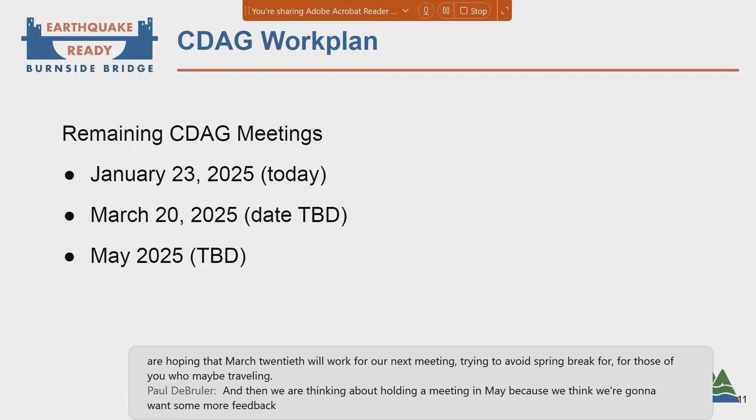We just wanted to give you a quick update on where we are for the work plan. We have our next couple of meetings that we're starting to plan out. Today, of course, we are honing in on March 20th, so ignore that TBD. We are hoping that March 20th will work for our next meeting, trying to avoid spring break for those of you who may be traveling. And then we are thinking about holding a meeting in May because we think we're going to want some more feedback from you all. So we'll get more information as we go through, but that's what we're leaning towards right now.

The next slide talks about our discussion topics that we still have to go through. Again, design is an iterative process, so you're going to hear things from the design team that's halfway through design. They're going to come back and you'll see things and it'll look different, and that's just this process. We want to keep you updated throughout the process.

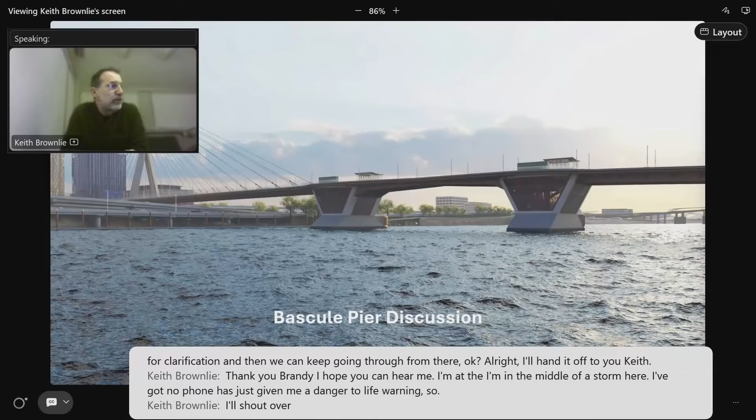Great, well thank you, Brandy. I hope you can hear me. I'm in the middle of a storm here - my phone has just given me a danger to life warning, so I'll shout over the melee, but let me know if you can't hear me. So the subject tonight is, well, as on the screen, the Bascule Pier as a discussion.

Also known to you as the in-water piers, these are the two significantly scaled pieces of infrastructure in the river, and all that's manifest with them.

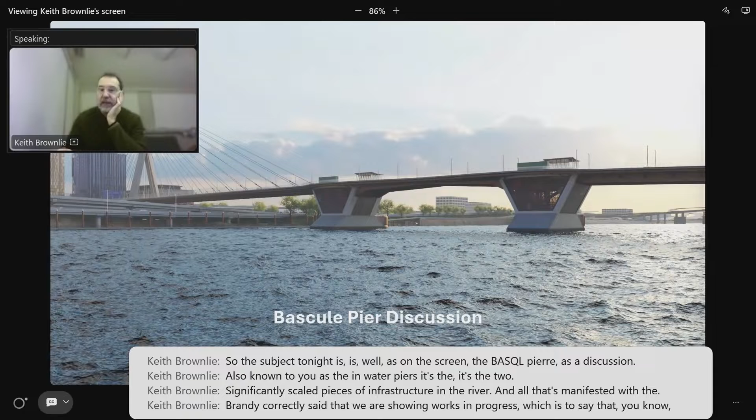Brandy correctly said that we are showing works in progress, which is to say we're not there yet, but it's a kind of full disclosure of where we're at, show and tell. Where we will land may not be exactly here, and this is architecture light. In other words, this is about layout and components, not about architecture, style or form per se.

So, caveats aside, we want to talk about the components and the adjacencies of those components in those areas. This sort of X-ray shot looking down on the deck, I'll break down, but what it tells you, and what I will repeatedly tell you, is that there are a lot of components at play. It's a complex composition, and of course our job is to make clarity and simplicity out of complexity.

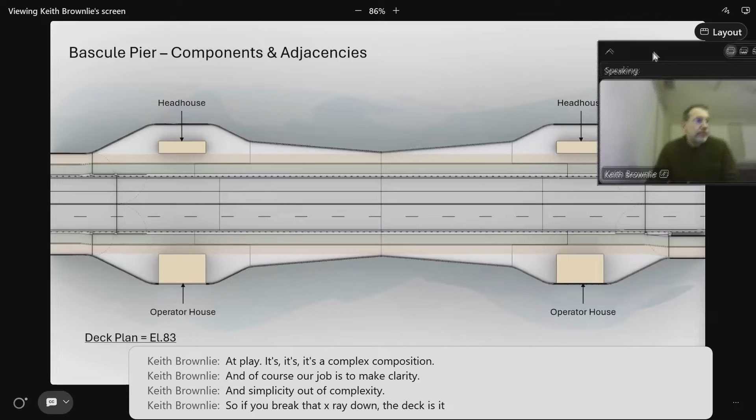So if you break that X-ray down, the deck is the kind of tangible thing that most people will experience. You've seen this before, the deck shape, and on that deck, aside of the highway lanes, in green there, the cycle lanes, and outside of that, the pedestrian lanes, there is a public realm. But it's not entirely public realm, because within that are parts of the moving bridge, non-public functions, which are the operator houses on both piers and what we are calling the head houses. I'll come back to that because that is a point of considerable debate amongst ourselves and possibly yourselves.

If you strip away the deck, you get a framework, and that framework is still a work of coordination. I'm showing you the moving bridge, but the moving bridge is contiguous with the fixed bridge on either side, and it can't be developed in a silo independent of those.

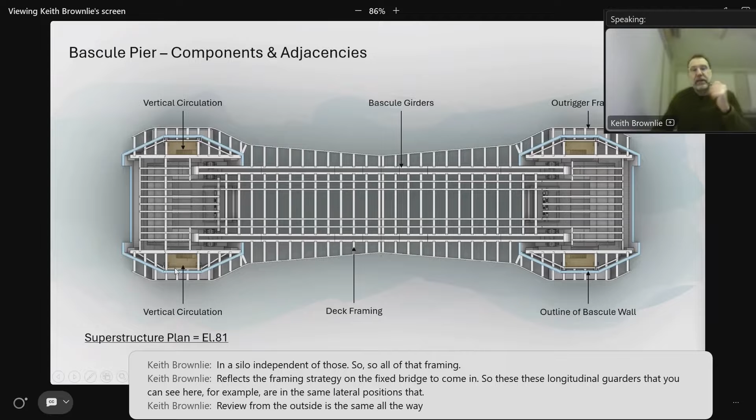So all of that framing reflects the framing strategy on the fixed bridge that comes in. So these longitudinal girders that you can see here, for example, are in the same lateral position as they are on the fixed bridge. So the view from the outside is the same all the way along the bridge, and that's that point of continuity that I've talked about since we first met.

So here are the two Bascule piers. This is the shape of them just underneath the deck, and then beneath that, as you go down and take a cut lower down, there's the Bascule chamber itself. Surprising perhaps to some people, the last time we spoke, is that what's in that is largely void. So what you're seeing here in grey is a big void space. The reason for that, which I'll show you in a moment, is because the counterweight of the moving deck disappears down into that big hole there. So it's a big object, but in terms of physical construction, it's a perimeter construction with a big hole in the middle.

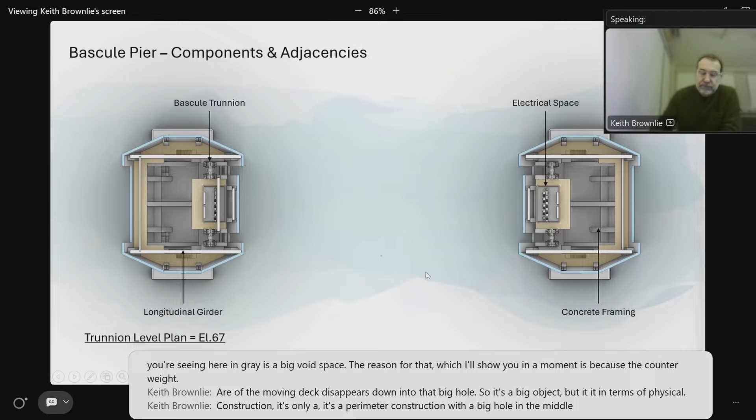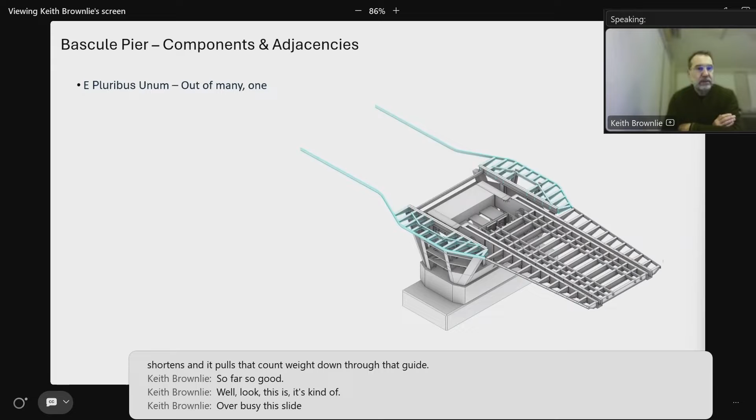Well, look, it's kind of over busy, this slide, but the point it's making is, well, there we are, a little bit of Latin for you: out of many, one. So out of that extremely complex composition, we're getting something which has legibility, that it can be read from the outside and from the deck as being a simple affair. I'm sure everybody's seen more than enough of that.

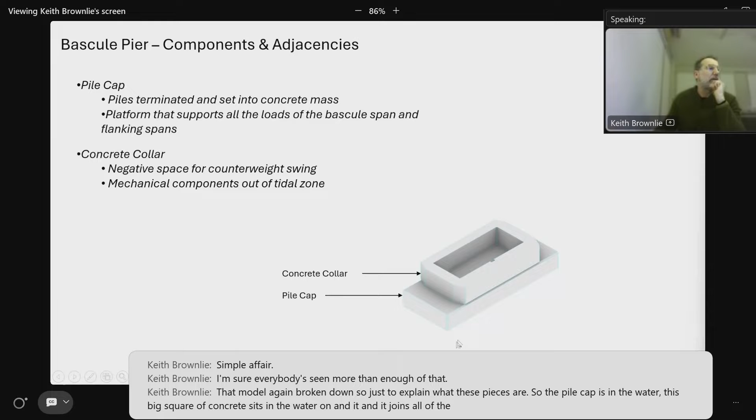That model, again, broken down - just to explain what these pieces are. So the pile cap is in the water. This big square of concrete sits in the water, and it joins all of the piles that go down into the ground. On top of that is a concrete collar. The top of that concrete collar is at the level of the 100-year flood. So this thing is a submersible piece.

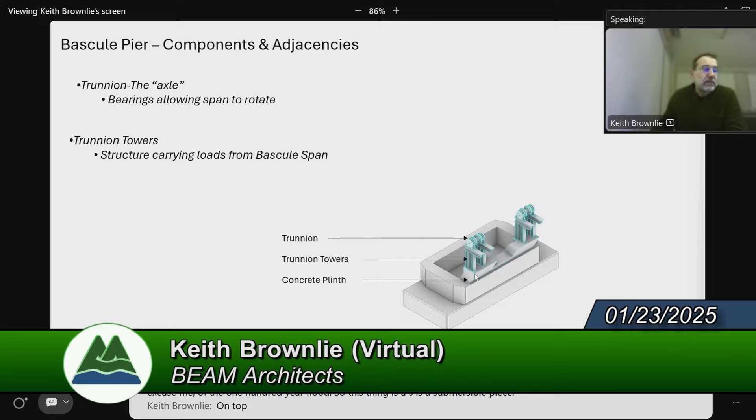On top of that, which I've already described, are the trunnion towers and the trunnions themselves. These are what carry the load of the deck down into that load-bearing pile cap arrangement down into the piles.

And then built around that is a framework that supports the incoming fixed deck, which is out here. Well, I hope you can see my mouse, but this is the primary framework that supports the rest of the bridge.

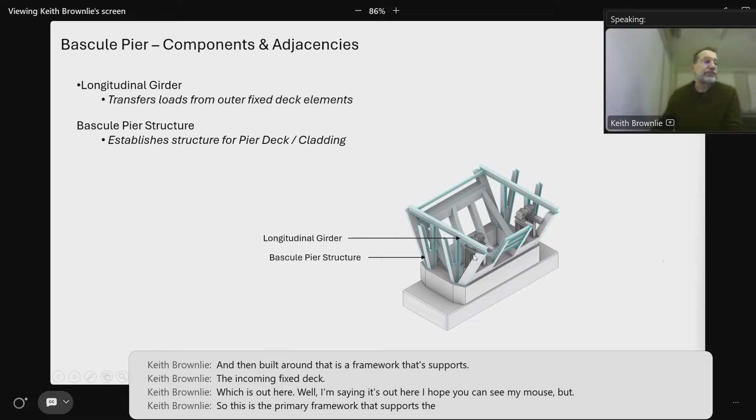And then layered into that are floor plates for circulation around those moving parts. Again, leaving out this void space, which is where the counterweight slews down to allow the deck to slew up.

Here are the primary beams, the bascule girders, and there is the counterweight sitting within it. As you can see, those primary girders sit with those trunnion bearings that rotate.

And then tucked between them, obviously it's an electrical procedure. There is a significant electrical room that sits in that space. So it's busy, and there are a lot of elements to contain. That sits within its own waterproof enclosure underneath the bridge, but within the bascule chamber itself.

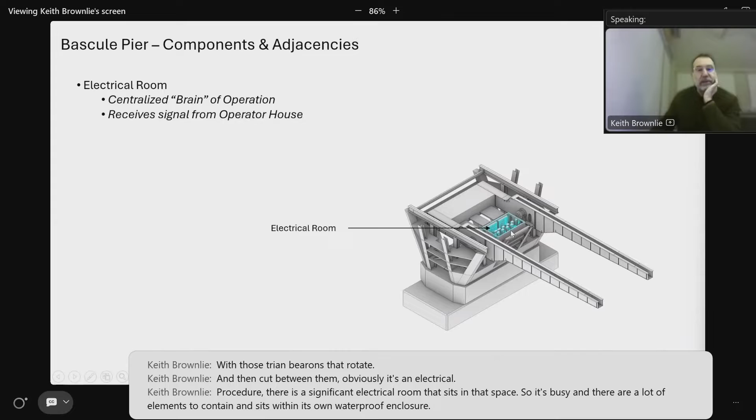And not my words, but good words, that is the brain of the operation. I previously thought that was me, but clearly not. And it receives signals, it receives instructions from the operator house above the deck, which we'll look at in another section of this presentation.

So those two primary girders are then framed with transverse structure across the deck, which will support the deck itself.

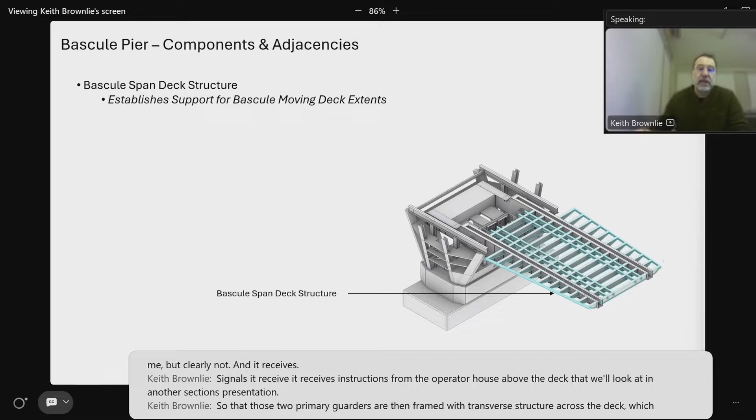That framework continues around the outside. This fringe that we have long talked about, this framework that runs around the outside and recesses all of the main structure, so that you get a thin edge, you get a shadow line over all of that primary structure, and it's architecturally an effective means of

giving manners to the composition, reducing, or not reducing the scale, but giving the impression of mitigating the scale.

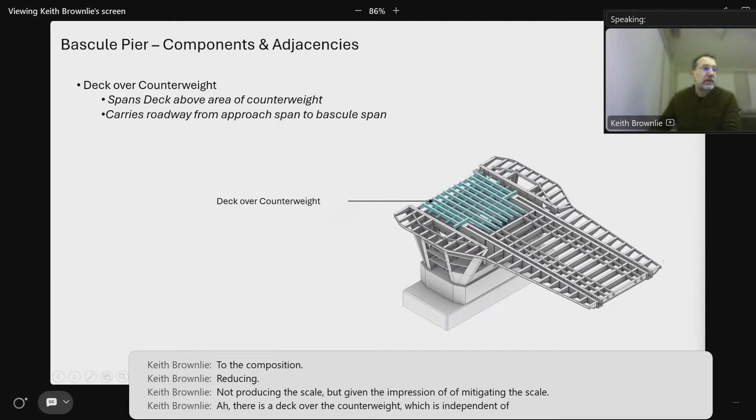There is a deck over the counterweight, which is independent of this lateral framing. And then this piece of deck sitting over the top is fixed. This is the fixed bridge.

Everything that you're still seeing the framework of is the moving bridge. You can see that those girders slot back into the fixed bridge. So there's not a straight line. There's a kind of integrated connectivity between the two.

And then we deck the bascule leaf itself. And then you see that that movement is facilitated. Okay, enough perhaps. It's doing it itself. Super.

And then, just to go back one, so you'll see that we're still seeing the framework down here. There will be a cladding to that bascule chamber. Now, the idea of that cladding is not weather tightness, because the bascule chamber itself is an unconditioned space. It's more akin to a rain screen and an architectural facade.

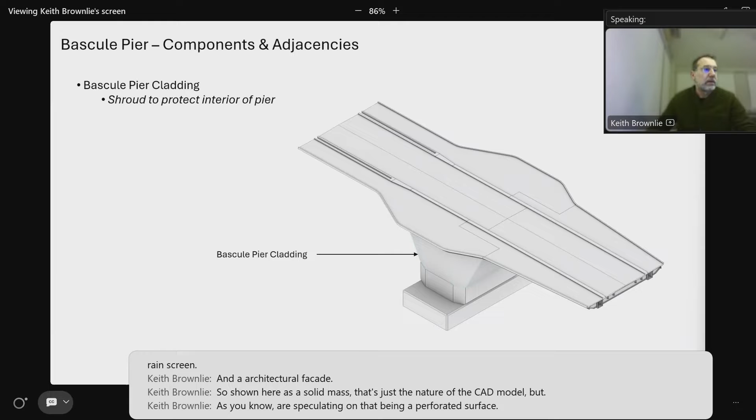Then the cherry on this particular cake is, there's a great word here, these are bridge appurtenances, which is a lot of the safety edge conditions, fencing, railings, guardrails.

The guardrail refers to the separation of the vehicles from the footway and the bike path. And then you get closable pedestrian gates and vehicular gates to stop bridge users when the bridge is opening, well short of the opening leaf, which is back here. So that is a predetermined set of distances from the moving parts back here, for safety.

Not shown here are the operator house, which sits in this location, and the head house, which sits opposite over here.

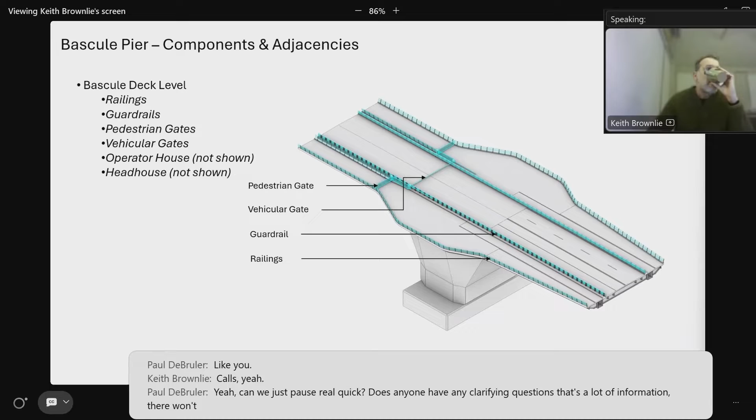So at this point, I don't know, Ravi, sorry, are we going to pause? Yeah, yeah, can we just pause real quick? Does anyone have any clarifying questions? That's a lot of information. There will not be a pop quiz at the end of this. So, but I think Keith is trying to help you all understand how complex this is, right? So are there any clarifying questions?

Yeah, just a quick clarifying question about the function and the distinction between the operator house and the head house. The operator house seems fairly self-explanatory, but I'm not quite sure what's the purpose the head house is serving.

Well, may I defer that question because it should be pertinently clear from the next set of slides, which deals with just that subject. Keying us up, Patrick, for the next. That works fine. Okay, thank you. Any other clarifying questions?

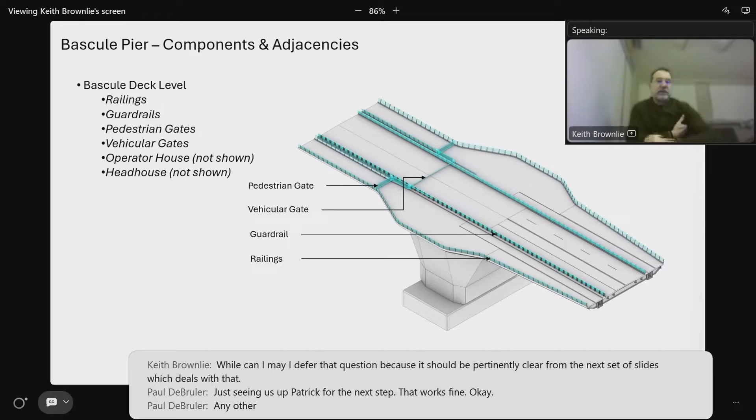And it's okay. Gwen?

I'm wondering about the watertight electrical chamber and its height above the river, and if it's equivalent to what we have today, and just how far over the 100-year floodplain it is, and what's the performance spec on that for the electrical specifically?

So Keith, could you hear that? I may not be the best Keith to answer that because Keith Griesing from H&H is in the room, but the chamber sits just underneath the deck, in this position, immediately under the deck. So it's physically as high as it can be without being on top of the deck. It's well above the 100 and 200 year flood level.

Any other clarifying questions right now? There will be time, at yeah, Valerie.

Just trying to picture what this looks like as it functions. Is the pedestrian gate and the vehicular gate for when it opens? Like, what is the function of the gate? Yes, those are to stop vehicles and stop pedestrians when the bridge is about to open.

Well, they are, as I said, at prescribed distances from the opening. So there's a minimum distance, but it's largely to do with the fact that if we put the pedestrian gates parallel or sort of continuous with the vehicular gate, at its requisite distance, we get into complications. You can see it's at the break point between the straight deck and where it flares out around the bascule chamber. So it's a swing gate, and it's about at its maximum. If we had it out here, you would be adding another about 12 feet onto that gate, which is just beyond reasonable.

Okay, great. Okay. All right, well, we'll pause there, and Keith, you can take it away to the summary.

Okay, well, it occurs to me that even within the team—the designers, the contractors, the owners, everybody concerned with the project—there is not universal clarity about the drivers for what is emerging as the design. That's both relative to the operations and in particular to the operator houses. So I just wanted to try and summarize the brief. I don't know that I've done that particularly well. I don't know whether this is a summary of the brief or just a brief summary, but these are some of the things that concern us as we go forward.

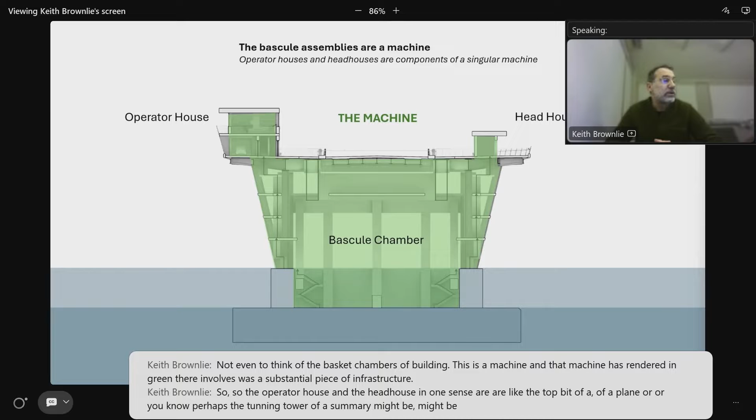So the operator house and the head house, in one sense, are like the cockpit of a plane, or perhaps the conning tower of a submarine might be a better analogy. And while I'm on maritime analogies, that machine, like all good machines, hides the majority of its workings. It's an iceberg—the ratio between what you see up here and what you don't see down here is significant.

So there are some clues in this, but they are not standalone items. They are very much physically and philosophically linked with what's underneath. This analogy falls down rather when you start to imagine this is above water and this is below water. Clearly it's not—it's above deck and below deck rather than above and below water.

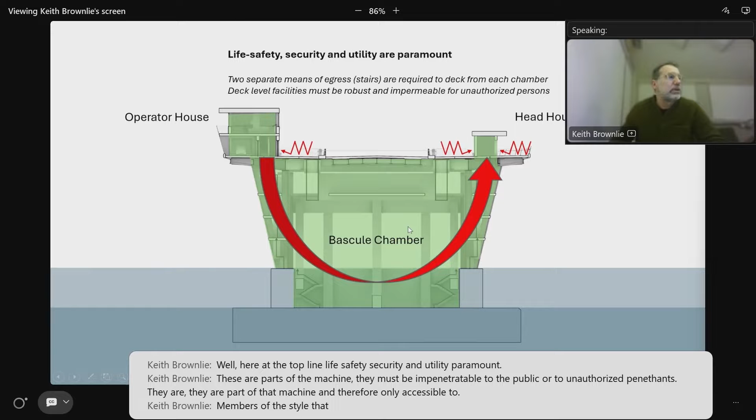So just rather more technical than the red arrow you just saw, there is a series of staircases and gantries in the vertical and horizontal planes. Now we don't have a lot of space in these things.

When it's set out, those black squares are the longitudinal girders, and the trunnions are in these positions. And that's the counterweight which goes down inside. So there isn't a great deal of space. So all of that circulation is done outside of the operational machine, so to speak.

And there's a lot of structure in here. So the staircase does what it needs to do to avoid all of those other constraints. Those constraints mostly being structure.

So over here on the head house, there's been a lot of discussion about the relative position of that head house. Should it be at the back of the path? Should it be on the outside of the deck? Should it even be beyond the deck?

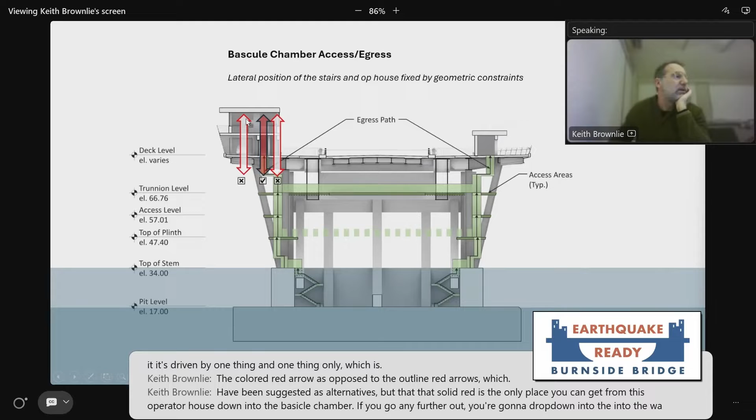Well, it's driven by one thing and one thing only, which is the coloured red arrow as opposed to the outlined red arrows, which have been suggested as alternatives. But that solid red is the only place you can get from this operator house down into the bascule chamber. If you go any further out, you're going to drop down into the water, like a medieval long drop. And if you go any further inboard in an attempt to change the arrangement of that building, you meet structure very soon, and you lose head height, so you can't locate it there. And that's important because it sets out the footprint of the building in space definitively.

I've said this previously, there are no public functions. And the truth is that the operator staff need safe access to get into their facility, which is up here. And the maintenance staff, who are incidentally not the same people as the operator's staff, also need that safe access. So they're going up and down,

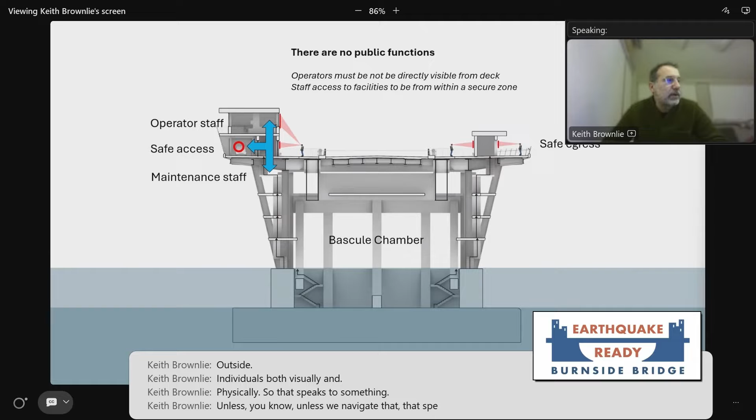and never the twain shall meet. And they need protection from outside individuals, both visually and physically. So that speaks to something solid. It's not a retail store or a coffee shop. It's part of a machine.

So it's not an insubstantial thing. It's a two-story facility. This is the deck level. This is the upper level, approximately the same footprint. We're working on the size, but you can see that out to out, it's something like 24 feet deep and 38 feet wide. It's bigger than the current operator houses on the bridge, but it's 100 years later. So there are better facilities, and I think you would have been into the current facility, which doesn't leave much room even for the imagination.

So just to look, I think the next slide would be looking at that deck level. So just to tell you what that deck level does.

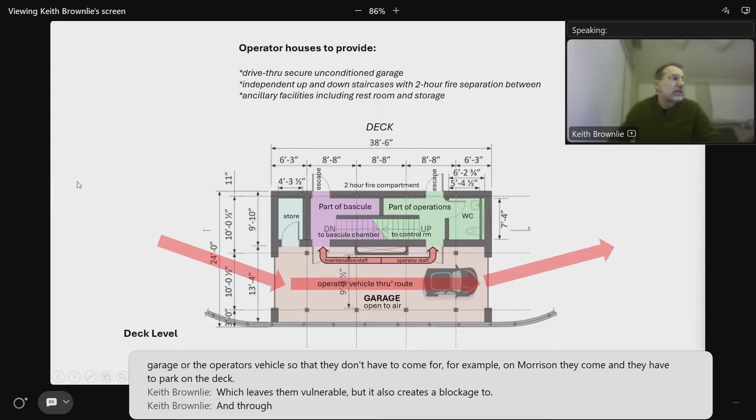There are two parts to it. One is essentially a staircase, also has a little bit of storage and a restroom. And the other part is the garage for the operator's vehicle, so they don't have to park on the deck like on Morrison, which leaves them vulnerable and creates a blockage to pedestrian and cycle throughway. So they come around the back into a secure garage, but it's not a conditioned space. That's just part of the deck. It's outside, but it's fenced so you can't get in, but it's open to air.

There are two colors on here because there are two staircases, one above the other. The green part with the restroom goes up to the control room. The purple part goes down into the bascule chamber. Those two are separate from each other because there's a requirement for a 2-hour fire compartment separation. The architects will know what that means, but really it means that to get 2 hours you need a significant amount of structure. It's not a lightweight thing; it's heavy construction to separate those out.

Just for your information, the maintenance staff and the operator staff are not the same people. It's very rare that the operator staff would go down to the bascule chamber, and conversely rare that the maintenance staff would come up to the control room. It does happen, but they don't follow the same staircase. They come out into the garage and back around. That's how that operation works.

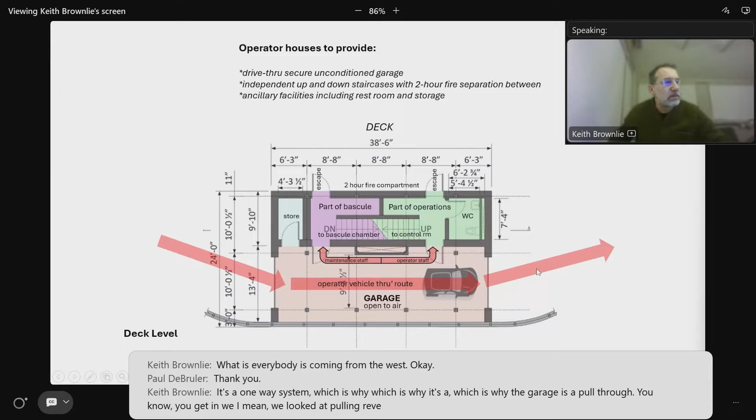And so would the east side operators come up, again, the bike path on that south side of the bridge? Everybody is coming from the west. Okay, thank you. It's a one-way system, which is why the garage is a pull through. You get in. We looked at pull in, reverse out, and all sorts of scenarios, but it lacks clarity.

Okay, great. Thanks, Bob. Gwen? I have a question about elevators. Are you required to put an elevator in addition to stairs? No, I don't want to undersell your question, but no, there's no requirement.

Okay, great. Thanks, Gwen. Patrick? A couple questions for you, Keith. First, the height of the 100-year floodplain, has that taken into account any escalation for anticipated changes from climate change? I've seen a lot of that happening in building design, where they're designing HVAC systems for anticipated hotter climates. Does climate change impact the potential 100-year floodplain, and are we anticipating that here?

Well, if I had a dollar for every inch of sea level rise, perhaps I'd be better off. What I was going to say is that the exact science of where that 100-year flood is isn't clear to me, but it's well above the required level for the brief that we have. What I would say is that, in common with any other facility like this, the bottom of that thing is just a sump, and that sump will have a pump to clear it out. It is floodable. There's nothing in there that would suffer from occasional overtopping.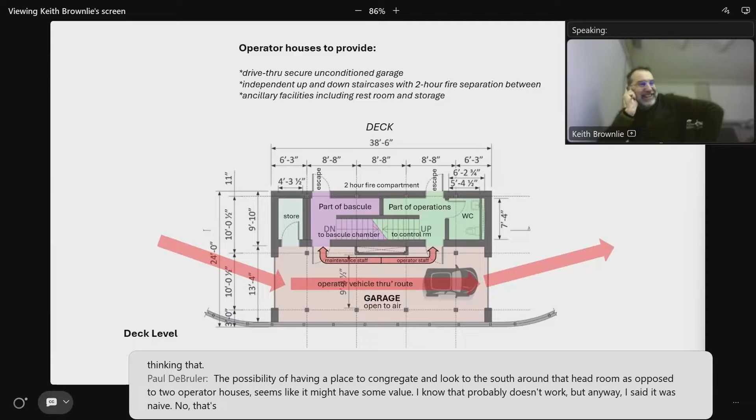No, that's why we're here, to ask questions. Keith, do you have an answer, or do we want to phone a friend? Yeah, well, no, I don't. I don't.

Obviously the public realm aspect of this is big on our agenda, everybody's agenda. One of the issues is that it's controversial to have public access behind those buildings, riverside of them, because of security and their invisibility when the bridge opens. What the operators will tell you, and I have a great deal of sympathy with it, is that people love to be on the wrong side of the barriers and hide and try and ride bridges. So there's a visibility aspect to that. It's just a sort of an aside, really.

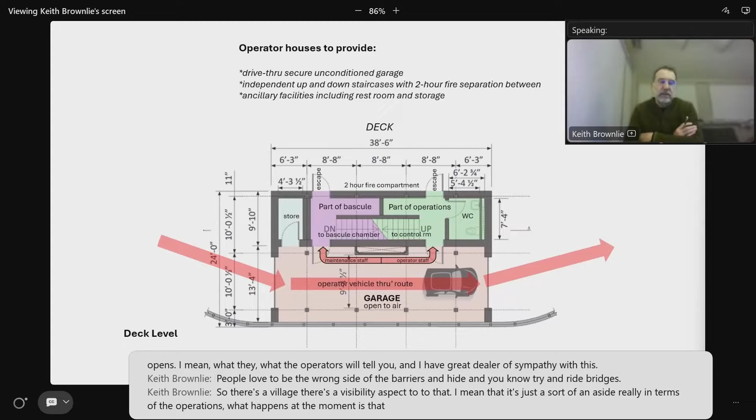In terms of the operations, what happens at the moment is that the operators drive to the end of the bridge on the west side, park, and walk onto the bridge, which is not very satisfactory from their point of view. So the brief says, can we drive to the bridge? So from our point of view, that garage is a kind of act of discretion, put it that way.

I'm hoping that we will come on to the public realm aspects, not so much on the bridge in this CDAG, because you can see from this, right, that there's a lot of information here, but there's nothing tangible in terms of experience or aesthetics. So we need to flush out these technical issues and then come back to you on what it means to the public realm. But the public realm's going to be great. That's all I would say.

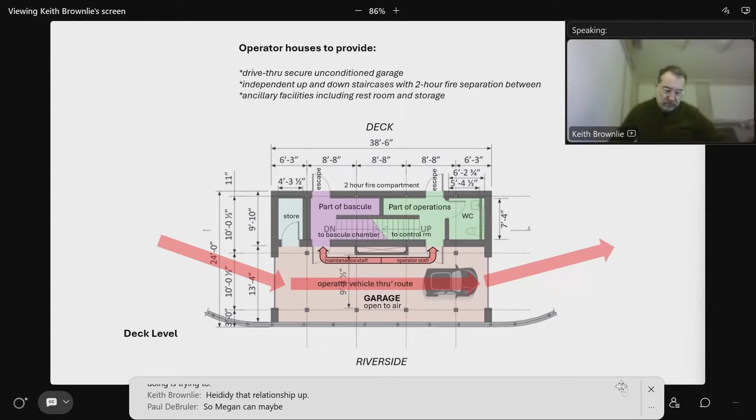So Megan can maybe answer some of this. Yeah, I can speak to this a little bit. You're right, we've not had cars throughout this whole 100-year life cycle of this bridge, but over the years, the operators have really felt unsafe performing their duties on the bridge. They're called out to the bridge at all hours of the night, and parking the car and then walking at night to the operator house, I've heard some people feel unsafe. On the Morrison Bridge, we bought a smart car because it's so tiny, so that people could drive onto the bridge and park the car next to the operator house. Those cars get smashed in the windshield. I think with this approach, we want to just provide a safe place of work really for the operator, which is why we're including a garage here. It's really to respond to operator feedback.

And Megan, can you answer the second part of Aaron's question about how often are cars parked on the bridge? Yeah, so whenever there's an operator called out for a lift, which on Burnside is on demand, then the car will be used. But with this new bridge, we're thinking about making it the 24/7 operation center for all of our bridges. Right now, that's Hawthorne. So any time of the day, you can call the Hawthorne, someone will be there. It's our eyes and ears all the time for our collection of bridges. But we're thinking with this improved space that we might transfer that to this bridge.

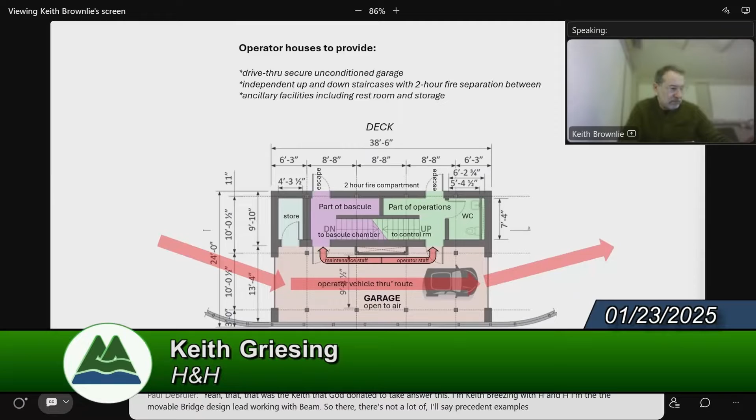I'm Keith Griesing with H&H, the movable bridge design lead working with Beam. There's not a lot of precedent examples on this particular instance. No, not that I'm aware of that have a physical enclosed protected space. We are in a parallel state with a number of bridges putting in a similar parking type facility that is not protected.

In the discussions we had with the county as part of this project, they felt that having that parking area protected was of utmost importance, not only for the safety of the vehicle, but for safety of the staff using it. There's a lot of discussion relative to the operators, but it's also dual purpose for the maintenance personnel, who usually come up with equipment, oilers, and other things of some weight. The ability for them to drive up to the bridge without lugging their equipment the length of the bridge is definitely advantageous.

So we opted for what we're calling a garage, but it's really open fenced space on three sides and enclosed on one side with the solid wall of the staircase - the best compromise to achieve all these goals.

When could we expect to see a sketch of what that's going to look like? I think there might be one in a minute. Yeah, in two slides.

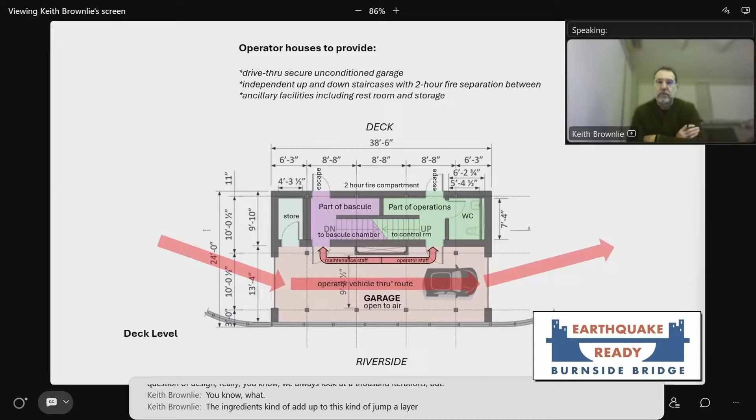the ingredients kind of add up to this kind of jambalaya. And I'm guessing, Valerie, you'd like to see them look at some other options. I mean, yeah, we've been talking about having a safe bridge, including for pedestrians. It seems like we would be working towards something that's keeping everybody safe on the bridge rather than just the operator vehicle occasionally, or operator.

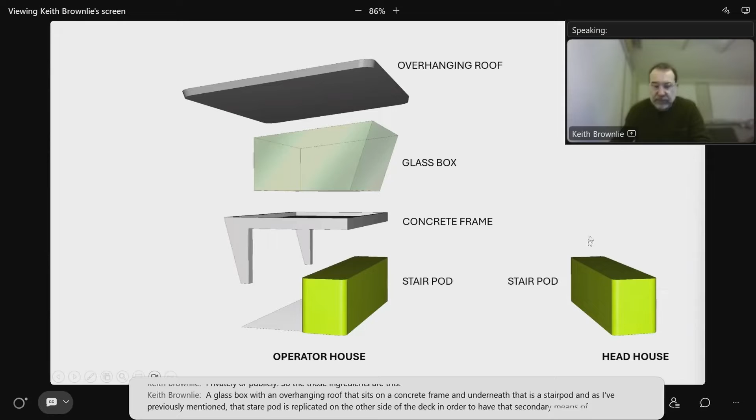If you collapse those things, you get this kind of form. This is a cartoon, not a building design. But it's all about this—about getting free circulation and clear visibility in that control room.

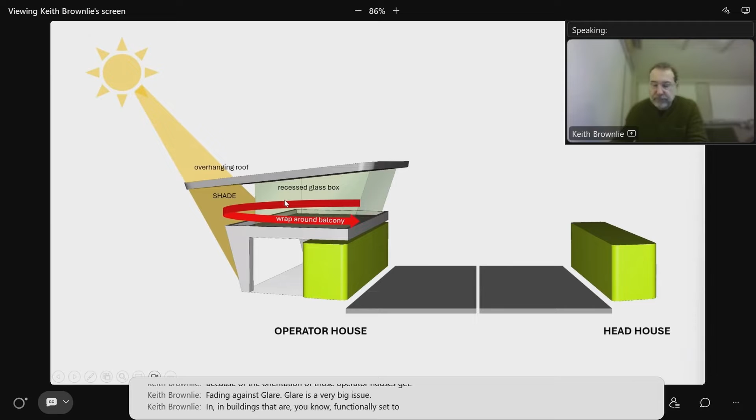There's also a pair of requirements, as I previously said, that by recessing that glass box, you get a wraparound balcony, which is desired. You also, because of the orientation of those operator houses, get shading against glare. Glare is a very big issue in buildings that are functionally set to be having clear sight out.

We've talked about this—there's the vehicular route coming through what is labelled garage, but is actually residual space to that idea that what you've got upstairs is bigger than what you've got downstairs, right? And then you've got that staff through-route for the head house on this side.

So look, I don't want to give you the impression that this is architecture. It's not—it's those components put into a model to see what falls out of it. So that green box is the stair pod, the concrete frame over the top that holds up the glass box. You've got an overhanging roof and some structure to hold up that roof. And there's kind of conversations between the framing of this and the framing of this.

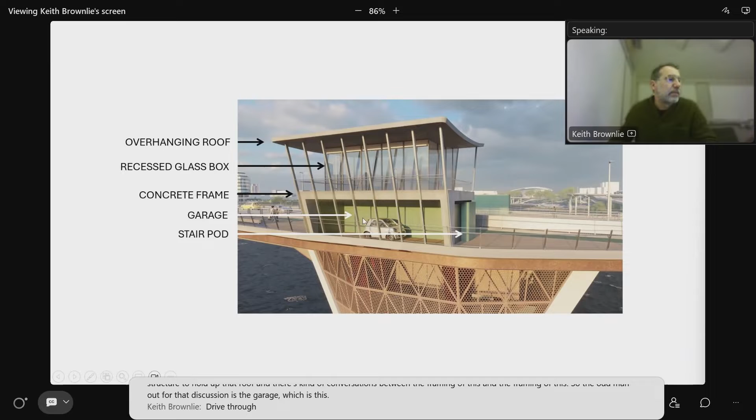So the odd man out from that discussion is the garage, which is this drive-through use of the residual space. But that's about magnitude.

So that thing is the embryonic form of the operator house. That thing, when you take away the control room, what you're left with on the other side is that thing. So there's this notion where we don't know what these will be in form, but there's this notion that on the south side and the north side, you get reciprocal pieces of construction.

And part of the reason for that is this: this is a very traditional thing in bridge design. There are reasons for it, which I'm not going to go into, but you'll see these all over Oregon, all over everywhere—that the center span, usually, and sometimes the entire span, is marked by these corner markers, these obelisks.

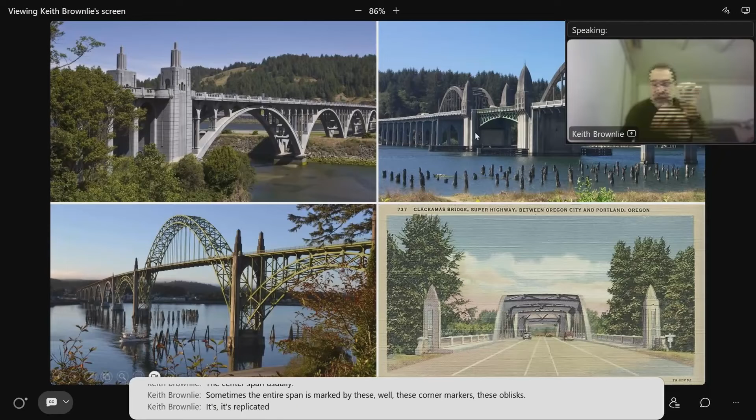It's replicated time and time again, so there's something that speaks to that idea. Well, look here. In really basic terms, here are those blocks. I don't think they'll be as tall or as blank or as boring as this, but it's that object sucked out of this composition and popped over here.

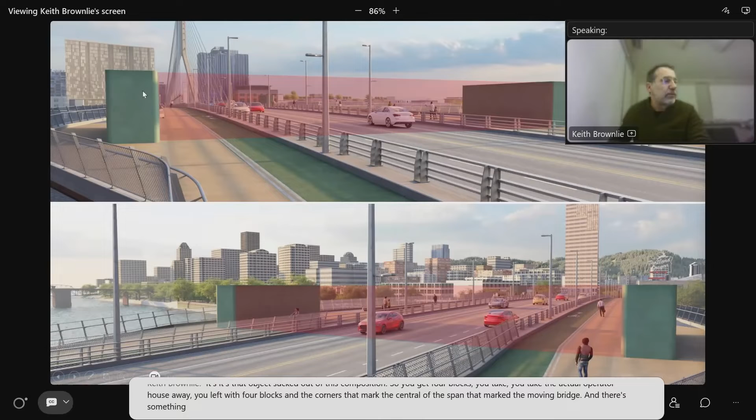So you get 4 blocks. You take the actual operator house away, you're left with 4 blocks on the corners that mark the center of the span, that mark the moving bridge. And there's something that signalizes that, and I think that will be very clear to the bridge users as they pass there. They know that they're passing into the center span.

Very briefly, this is what we have to respond to, and I mean that decidedly. We have to respond to this. These are the best bits of that bridge, unless you're a kind of structures nerd like me. The materiality and the color of these are interesting. This is not — I mean, these are masquerading as 19th century from the early 20th century. I don't want to masquerade to be either 20th or 19th century in the modern era, but there are clues in here. So what could we use?

Patinated copper — it's a very traditional moving bridge material. Glazed blocks and bricks is something that might be of interest. The 2-hour fire rating is difficult, but here, could these blocks be illuminated?

Does the glass feel vulnerable? Well, yes, but there are ways and means. This product here is called Kalwall, which might begin to deal with that, so that those blocks might become corner lanterns rather than corner blocks.

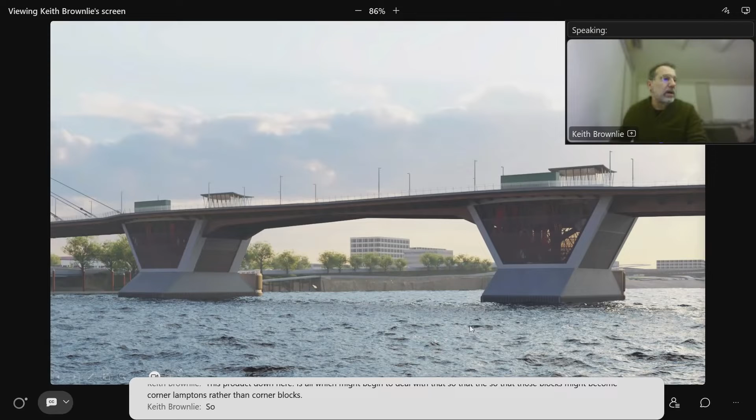I think we're over-egging the pudding here a little bit, but this is the kind of magnitude of those things, right?

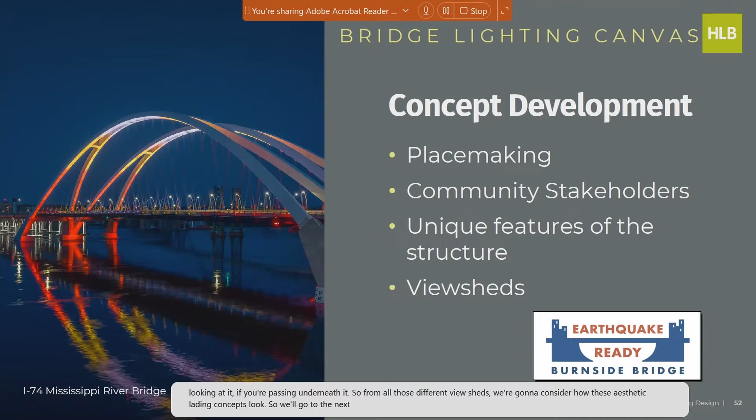So we'll go to the next slide. We had a lot of help when thinking about what the community stakeholders thought by taking a look at the guiding principles that you all shared with us. There are a few that aesthetic lighting can really help support. One of those is, how do we support balancing the scale between these different aspects of the fixed bridge and the movable bridge? How do we create its place in the Portland skyline in an appropriate manner that helps blend in with what's already there and celebrate this new bridge?

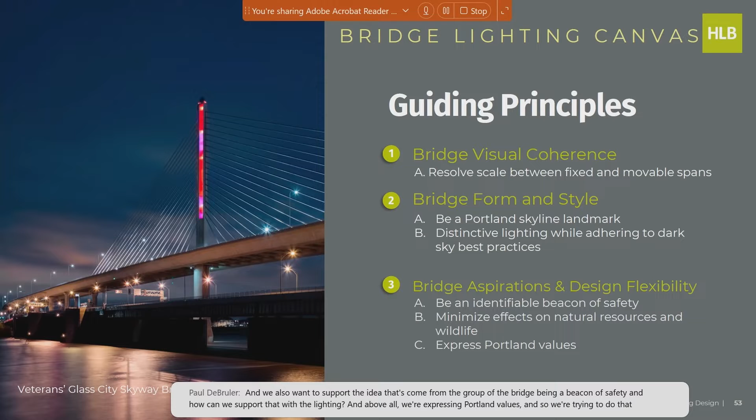But of course, we also want to be sensitive to the nighttime environment, so we're respecting dark skies, being thoughtful about minimizing effects of lighting on our surrounding natural environment. We also want to support the idea from this group of the bridge being a beacon of safety, and how can we support that with the lighting. Above all, we're expressing Portland values, and I think we're already addressing a lot of that with these guiding principles.

So let's be clear about what is an aesthetic lighting canvas. Our goal for this meeting is to really set what parts of the bridge make sense to light, what is the canvas of light we're going to have and be able to use aesthetically. If we focus on that this meeting and get to a place where we understand what the canvas is, in March we'll be able to talk about scenes, where we can talk about color, is it static, is it dynamic, all those aspects of light.

Just as an example, the bridge up here is I-74, which goes across the Mississippi River between Iowa and Illinois. This bridge, all in white light, is showing its canvas. The decision was made to only light the underside of the arch. They had to decide which sides of the piers to light, the fact that they are not lighting the edge girder, and then they made a decision that only the arch is color changing.

So with that established canvas of that bridge, if we go to the next slide, then we developed the scenes you see here. That community thought about which events, which festivals, which seasons they wanted to celebrate with different colors or motion or static scenes. That's what we'll talk about with this bridge in March. But to get there, we have to figure out what parts of this bridge we want to light.

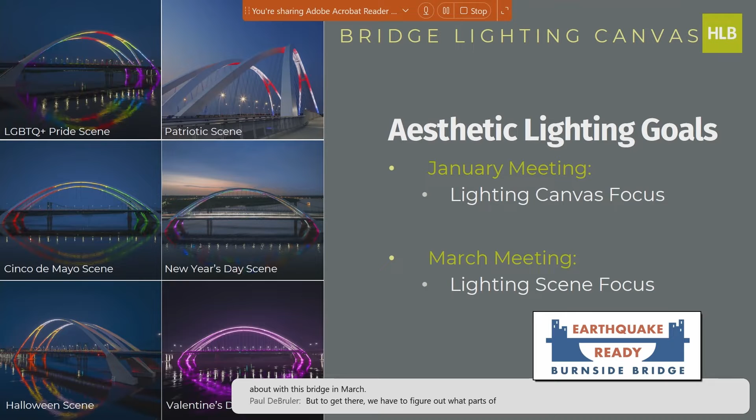So, taking into consideration all of these principles and then applying them with light to the bridge, let's dig into the concepts here. This first concept we're calling internal glow.

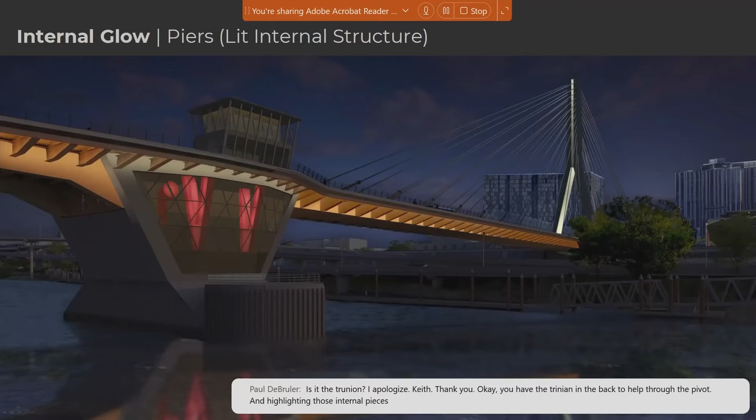So if we go to the next slide, I just wanted to remind folks, renderings can do a lot, but with lighting, sometimes photographs help too. Those middle images are showing examples of lit structure behind a perforated panel, that internal glow showing off the inside that you don't see during the day. That's the effect you'd get with lighting those internal components, versus the outside images where we're applying light to the outside of a perforated panel, highlighting that surface and showing it off more as a solid than something that's see-through.

Okay, so here's the first option to think about. This one is showing that same concept, except we're adding a second layer of light at the base of the bascule pier, lighting up on that perforated metal panel surface. So you'd have two layers of light there at the bascule pier. Some evenings you might only light the exterior, or only the interior, or balance both, giving you an extra layer along with the other lighting we've talked about so far.

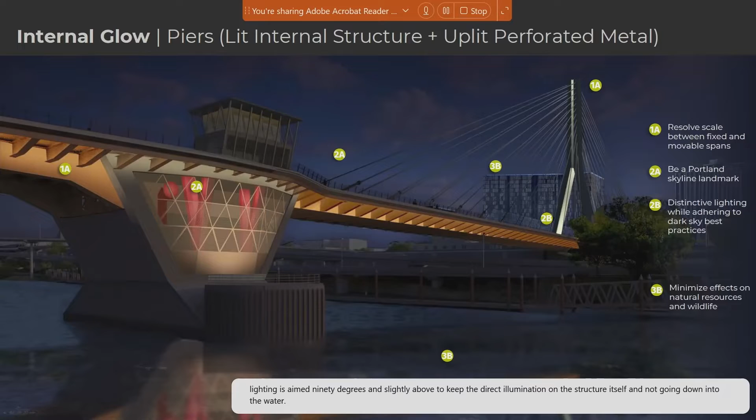Those additional layers of light really help with that sense of safety as you're trying to travel underneath a structure like that. You have some vertical illumination so it feels brighter, as well as balancing that functional light so there's more uniform lighting and it's easier to move through, as well as continuing our distinctive aesthetic lighting that's going to carry all the way across the bridge.

Okay, so now we're going to our second concept. It is similar, but slightly different. This is using a direct view line of light all the way from the top of the tower, and then it splits and frames the opening in the tower. A direct view fixture is a fixture that's meant to be looked at.

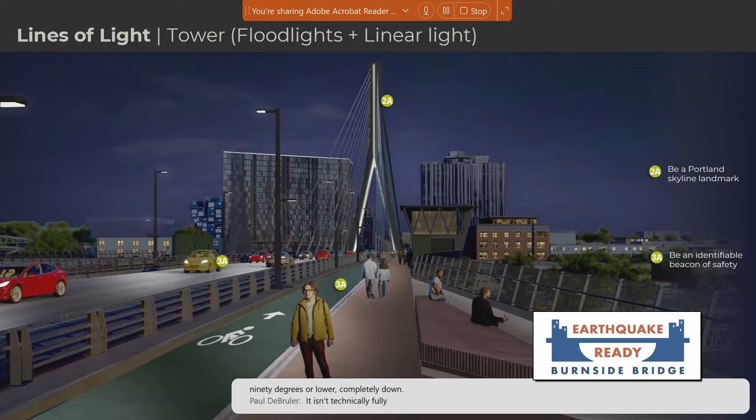So this is another distinct view to add into the skyline. I think it's still well balanced with its neighbors, and we have the same functional light. But because that's a direct view light and it isn't directed 90 degrees or lower, completely down, it isn't technically fully dark sky. But it is within compliance of the city of Portland, which we considered for their different facades and building lighting requirements.

Let's go to the next slide. You'll see much of the same comments about how we're marking out the different principles, resolving the scale between the fixed and the movable bridge. We are having that skyline landmark look for the tower.

We are trying to minimize the light, and we are minimizing the light in the water, but we do have a little bit more light going out into the sky because we have that direct view fixture on the tower. Let's go to the next slide.

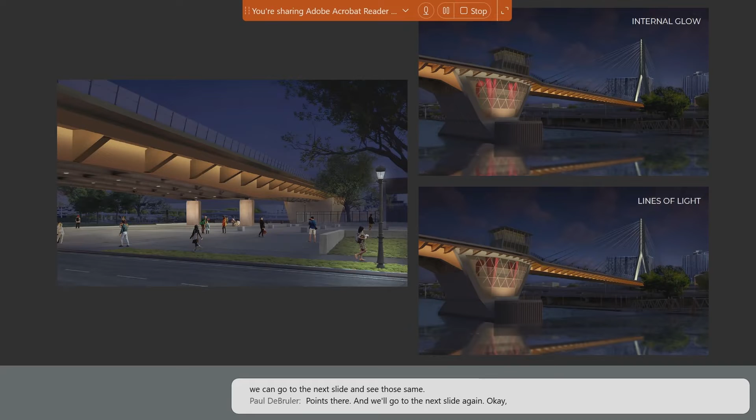Okay. So we cruised through that a little bit because I want to make sure we get a chance for folks to think about and respond and see what you all think of this.

I'll just note on here on the left, we have the park that we saw, but the things we have to talk about are these two different approaches to how that tower is lit, as well as the three different ways, the three different layers almost, of light on the pier with it — whether it's just that internal structure light, just the exterior floodlight of the perforated panel, or both.

Sure, let's go to the next slide. So what we're looking for is the opportunity today to hear a discussion about this lighting canvas that we've brought to you all. We're hoping that these lit elements get established so that once that's settled, we can all talk about scenes and colors and motion and how that aesthetic lighting is used.

Yeah, awesome. So we might have to go back and forth between that one previous slide. I want to just get clarifying questions before we do a temperature check. So let's see, I do not know who went first, so I'm going to go Patty, Gwen, Ian, and Eric. Did I get it? Okay, go ahead. Thank you.

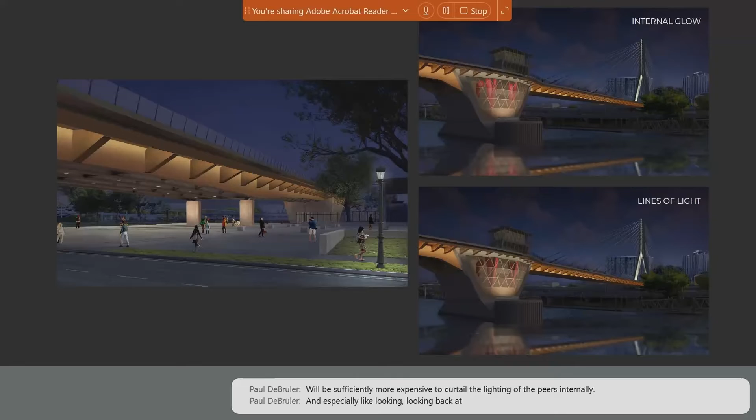So I'm a little bit concerned with the lines of light that, even though it meets Portland standards, it's not technically dark sky, so I'm a little bit hinky about that. I'm also disappointed by the fact that the lines of light will be sufficiently more expensive to curtail the lighting of the piers internally. And especially looking back at the schematics for the piers, if they were to do the kind of transparency on the bank sides of the piers as well, that could add further engagement for people walking along the river looking from underneath the bridge toward the bridge piers, because there's no reason that has to be solid, looking at the schematics. That's it.

Okay, thank you, Ian. Eric? Yeah, I just wanted to say the undermount lighting for the girders is a really, really nice addition. And when we're talking about eyes towards safety, as someone who's been working under that bridge for the last 20 years, I can say in that area that's fantastic. My clarifying question is about the lamp posts there. I know this is probably not part of the bridge per se, but is additional lamp posts like I see there, which I don't think are there now, part of this project too? Who wants to answer that?

I don't know the extent of the functional lighting that's going to be done underneath the bridge if it goes beyond the width of the bridge, but I believe the electrical engineers, and we're working with them to coordinate all our lighting, are looking at the functional light at least directly under the bridge. I think you were talking about on-bridge. Well, I was talking about both, I was just looking at the picture and thought that looks really nice. Oh, underneath, yeah. So I think it is being considered, but that might be something we can follow up with you about exact numbers. Sorry, I didn't say that into the microphone, but we can get back to you. Okay, I saw more signs up.

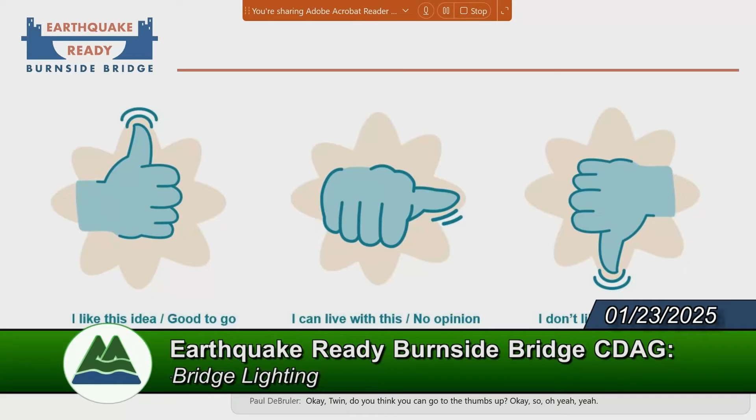Sorry, go ahead Aaron. It doesn't seem like there's a tremendous difference between the internal glow and the lines of light. For a majority of the bridge, we're talking pretty much internal glow, right? So when we're looking at the view from the underside of the bridge, we still see the same point lights on the underside. I feel like lines of light doesn't even feel like a viable scheme because it's relying entirely on the internal glow for a majority of the scheme. Other than what it does for the inverted Y, I have trouble understanding how someone looking at that image on the left is going to see those point lights and that internal glow on the underside of the bridge and say this is about lines of light.

I also agree with the comments about the internal glow of the bascules. I think it's quite nice, and I don't really see the benefit of having an external light lighting it up. I'm assuming the color change between the yellow and cooler lights at the bascule is intentional, but I don't know what that's doing—it seems a little unclear in my mind.

I think in this case, because we're trying to hit one basic white light color temperature, it's expressing the different finishes. But you're right, if we set a white light scene with these, we could dial it warmer or cooler so that they are more balanced.

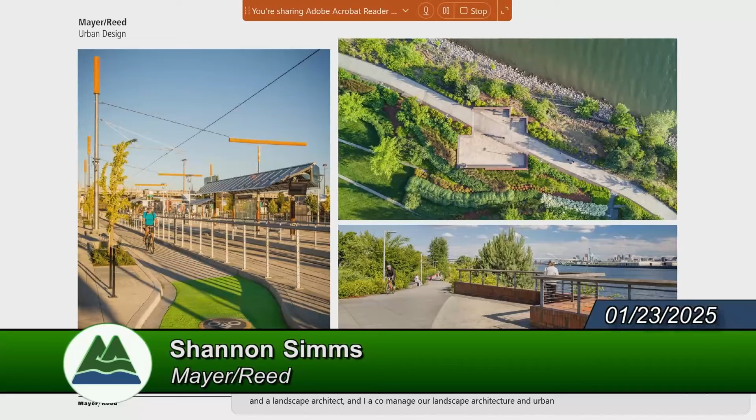So are you progressing slides? Thank you. So we are a landscape architecture and visual communication studio. I'm Shannon Simms, an associate principal and landscape architect, and I co-manage our landscape architecture and urban design practice with Jeremy Shane, and Kathy Fry manages our visual communication practice. Together we oversee a 30-person office in downtown Portland, Oregon. Our work focuses on the design of the public realm to elevate a sense of place in complex urban environments. We really love connecting people to their natural surroundings, and in particular the Willamette River is both our home and a focus of a lot of our project work.

Next slide. As Shannon mentioned, my name is Kathy Fry, and I lead the visual communications group in our studio. For those of you who don't know what visual communications is, our work focuses on the experience of navigating the built environment and considers the role of information and graphics to provide context. We specialize in placemaking-driven wayfinding, landmarks, identities, graphics, and art integration that connect people to place.

Okay, so I'm going to start with an overview of just how we see the Burnside Bridge before we dive into some specific opportunities on the east and west sides. So we know it's one bridge, and Elizabeth did a great job of talking about that lit girder that will be a continuous element, and Keith has spoken in the past about the architectural efforts to kind of unite and create flow across one bridge.

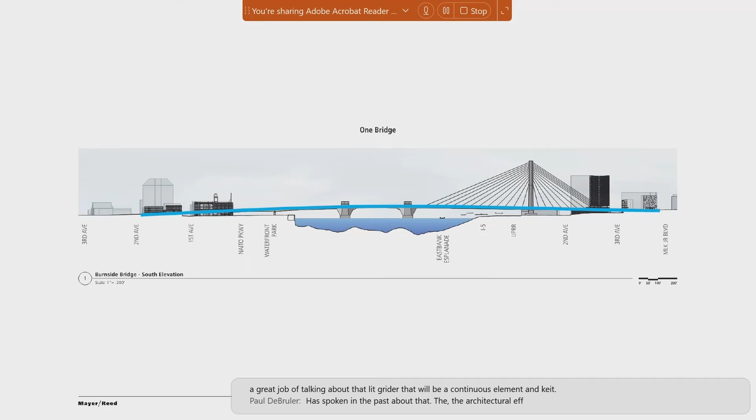But we also know that the bridge spans some really distinct different zones. There's the Skidmore Old Town Historic District on the west side, the portion of the bridge that spans the actual Willamette River, and then the portion that spans and lands in the Central Eastside. Part of our work is making sure that the bridge stitches into those different zones, acknowledges them, and elevates that sense of place I mentioned earlier. Next slide.

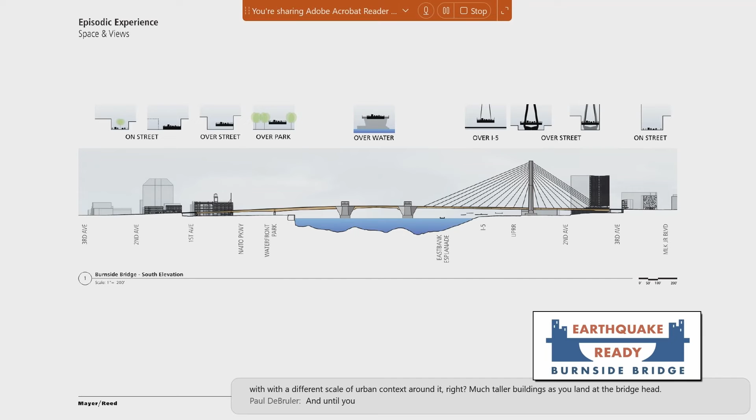In addition to that, from the perspective of someone moving across the bridge, your relationship to your surroundings is constantly changing. So above the bridge drawing is just a series of simplified cross-sections of what that experience, that episodic experience, is like. From the west, you go from being on the street in that historic district with the particular scale of buildings around you, to lifting off and hovering above the street at that second story level, to then floating over the park and having those longer views up and down that green space, to then being over the river where those views expand much further to the city and the context, to then going over I-5, and in our bridge design that will start to have that focal point. Those cables are going to draw your eye up, and you're going to focus more on that tower as you then enter the Central Eastside with a different scale of urban context around it—much taller buildings—as you land at the bridgehead, until you land on the street again at MLK. Next slide.

It's worth noting that our perception of those decibel levels changes as our experience changes, and it depends on the amount of visual information we're processing at the same time, and then different breaks in relief from that sound.

For example, on the east and west side, sound bounces off the buildings, elongating the sounds of traffic, and we're surrounded by a lot of visual input from the building facades.

At the center of the bridge, we have relief from visual complexity and wide open views. We're aware of the wind and the bridge deck moving from cars passing, but we also experience much longer breaks between traffic, giving a sense of calm and relief where people may want to linger.

The loudest portion of the bridge is over the I-5, which offers really no audio relief, at least at the time this was taken during rush hour, with a constant hum of traffic.

So as we explore this urban design experience and opportunities, we're thinking about the history and stories that are going to influence our design choices.

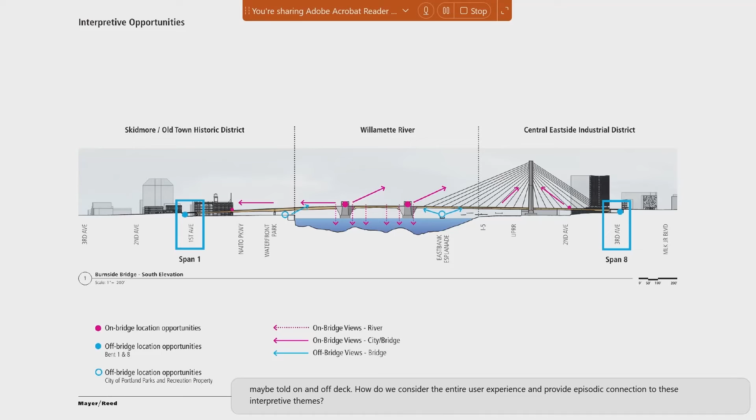A key area will be the center of the bridge, which we're not really talking about today, but that's where we have views of the river, the city, and the bridge towers.

Key locations off-bridge or on park properties offer a view of the bridge, which could be a good place to talk about its design. But today we're going to focus on opportunities where the bridge touches down on the east and west sides.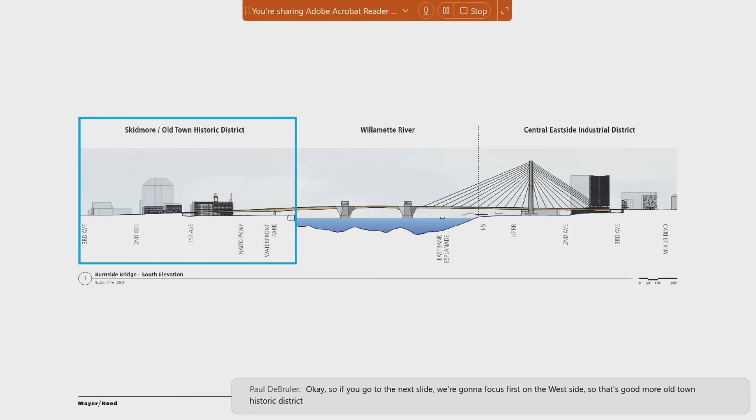We're going to focus first on the west side. The Skidmore Old Town Historic District, mentioned earlier, officially begins at the seawall edge of the river there.

I'll further summarize them by showing some photos, which is easier than reading text on a screen. A lot of the goal of the guidelines is interest in preserving the street grid and the sense of urban enclosure.

There's also a focus on reintegrating the cast iron character of the district. Something the district is really known for are the historic cast iron facades, still somewhat existent today but very prevalent in the past, along with the rich textural quality and level of detail incorporated into those facades.

There's other material guidance encouraging the use of stone and brick masonry, ornamental street lighting, and other architectural details consistent with the district.

The general overarching goal of these guidelines is that as new construction of any type comes into the district, it maintains the same rhythm, character, and texture as the existing historical portions.

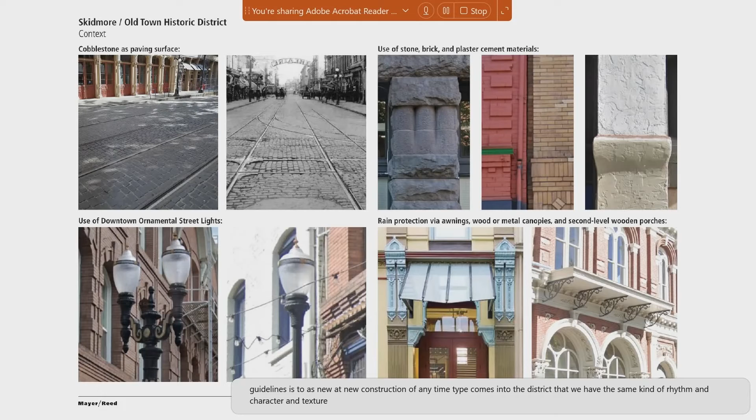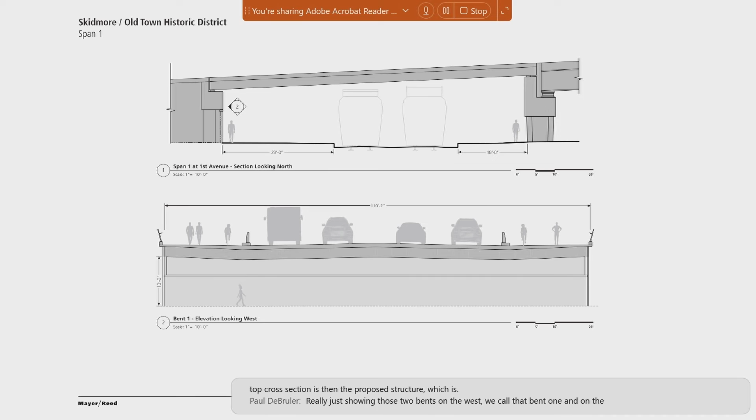If you go to the next slide, that top cross-section shows the proposed structure, really just those 2 bents. On the west we call that bent 1, and on the east is bent 2, and this is span 1. It's around a 70-foot right-of-way, just for pedestrians and light rail, so really a lot of space down there that will be significantly more open than it is today.

Bent 1 is the abutment wall, over 100 feet long and around 13 feet in height. You can see in the lower image the scale of that relative to a pedestrian. It's quite large. Bent 2 is a different structure.

It's a low beam supported by 3 piers, but there will be transparency underneath. You would be able to see through to the parking lot and to Naito beyond if you were looking eastward.

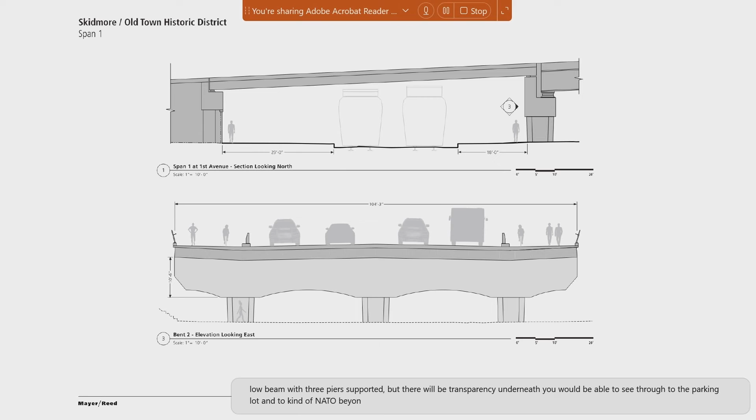Given the scale of the structures and their location on this cobblestone street in the historic district, we think this is a really good opportunity for detailing that responds to those historic district guidelines. I'm noting in particular a guideline that emphasizes the reintegration of cast iron facades in the district, with a particular goal to do that at the Skidmore Fountain and along First Avenue between Burnside and Oak, which is right where our project is.

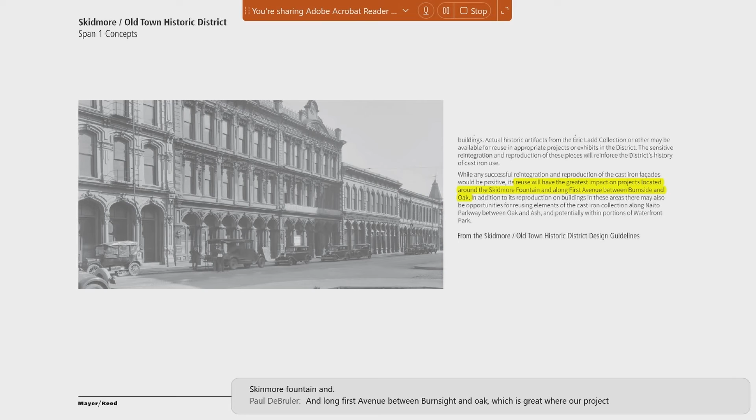We're in the very early stages of exploring what kind of materials are available, but there are salvage materials from the district that are promoted in the guidelines as something they're interested in finding homes for. So we're exploring what may be available and how that could be incorporated into the Span 1 streetscape environment.

That could take a variety of forms, anything from interpretive signage to actual location of some of the salvaged items in the streetscape.

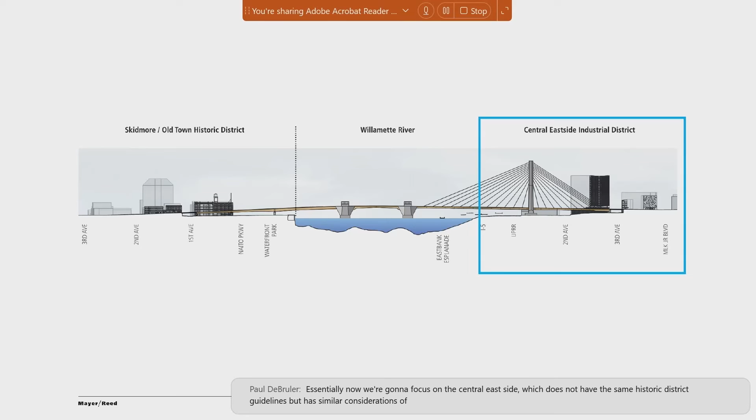In these architectural renderings by Beam arriving on the east side, we can see that the above-deck bridge structures, the tower and cables, are consistent with the scale of the development and create a sense of arrival.

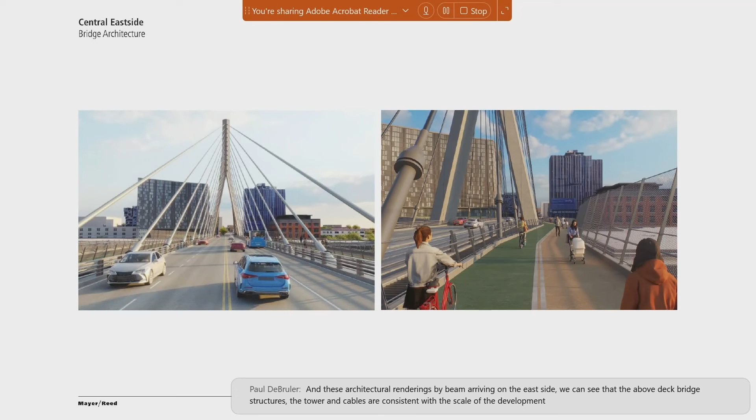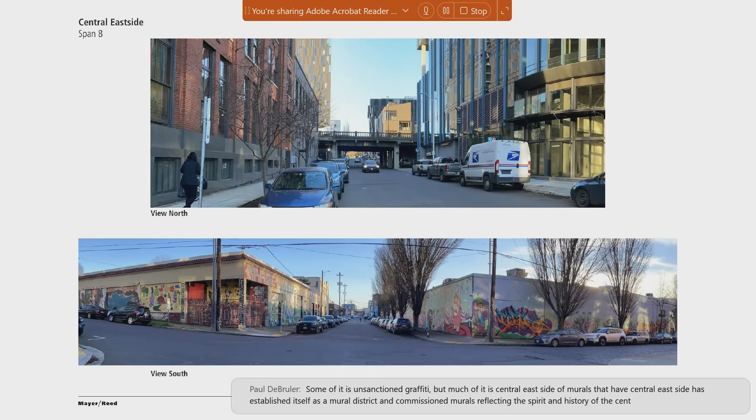The top photo on this slide is again standing on 3rd Avenue looking north towards the bridge, and the bottom photo is standing in the exact same location with a 180-degree turn looking south towards the industrial scale buildings covered with murals. The visual difference is striking. Some of it is unsanctioned graffiti, but much of it is Central East Side murals. Central East Side has established itself as a mural district and commissioned murals reflecting the spirit and history of the area, with themes voted on by community members.

We're early in the process of discussing the opportunities at Span 8. The top cross-section shows the bridge at 3rd Avenue again. The elevation at the bottom illustrates the scale of the west wall at Span 8, around 16 feet tall at its highest and 78 feet in length where it's solid. There are openings at each side for access, and the skate park is just beyond this wall.

On the next slide, we can see the scale of the east wall is even longer, at 109 feet in length. These walls are similar in scale to building facades, and they offer opportunities for large-scale graphics or a mural that will better relate to the pedestrian scale and create continuity with the under-bridge experience.

We don't know what that is going to look like because we're so early in the process. We're just identifying opportunities, exploring what activating these walls could look like. It's an obvious opportunity to hold these walls for the Central East Side to be a painted mural, procured through the public art process and maintained as public art.

It could also be an opportunity for the Burnside Bridge interpretive themes to spill out and connect to the east side. A few key themes from the topics have been identified as relevant to this location and could be explored through interpretive panels, as shown in the top image, or architectural materials such as a durable graphic panel system or cut metal with internal illumination.

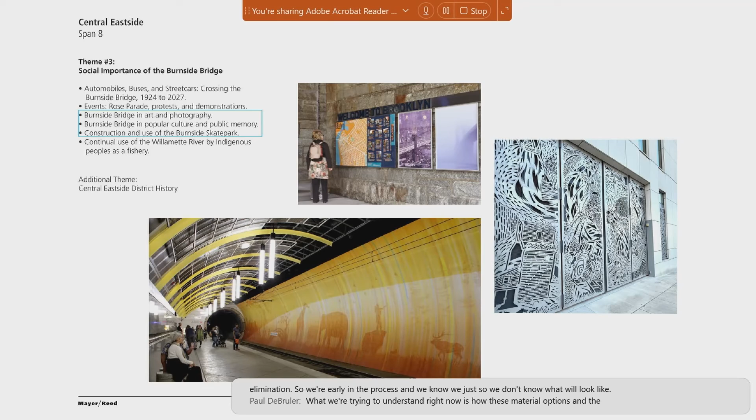We're early in the process, and we don't know what it will look like. What we're trying to understand right now is how these material options and the procurement process will influence the long-term maintenance plan for this area, and that will be a key driver for deciding the direction.

Do we want to have time to talk about these or cut these?

No, go ahead. To illustrate some possibilities and how decisions about procurement and materials influence maintenance, I'll share a few quick Mayer/Reed projects of similar scale, just to think about the possibility. This is Washington Park Station, TriMet's only below-grade station.

When it was first completed, the track sidewall was left blank for budget reasons, leaving a large-scale surface that over time became dingy for waiting passengers to look at. As part of a station renewal project, Mayer/Reed was commissioned as the artist team to create two 200-foot-long illustrated murals celebrating the destinations within Washington Park, with playful, colorful illustrations.

Those murals took on the color schemes of the original station design, along with some new illumination by the ZGF team. It was printed on wall covering and a protective covering that can be cleaned and replaced. It's maintained by the TriMet Public Art Collection.

The next slide is MacLaren Youth Correctional Facility. A series of 6 murals were created. To meet security and maintenance requirements, the murals are produced on powder-coated graphic panels out of the touch zone. The energy of the murals is extended over the entire wall with a simple pattern that is painted and easy to touch up. In this case, Mayer/Reed provided facilitation and architectural integration and hired an artist to create the original artwork.

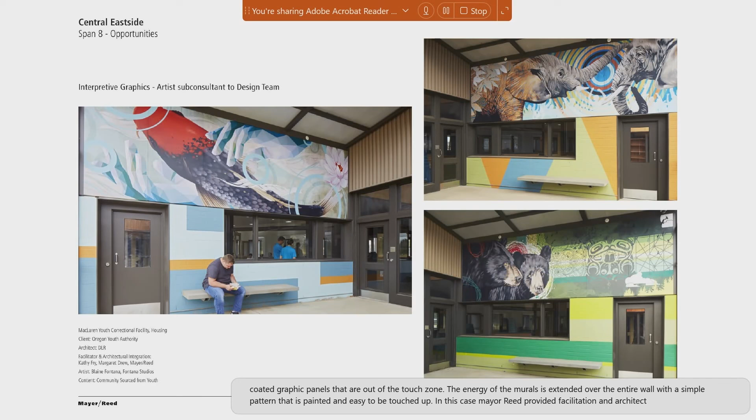And the last slide is an example from the Washington School for the Deaf, where a cut metal gate spans 200 feet between two buildings, creating an architectural pattern that breaks down the scale with interpretive themes developed by the client. The material is highly durable. It can be power washed and touched up with paint. In this case, it was designed by the design team and is maintained by their maintenance facility.

If you go to the last slide, we'll just say thank you for letting us extend the meeting time slightly and allow us an opportunity to introduce ourselves. These were just two example areas of many areas that we'll be coming back to talk about more later as we figure out the best places and ways to connect people with the place of Portland, the Willamette River, and the Burnside Bridge. So thanks so much.